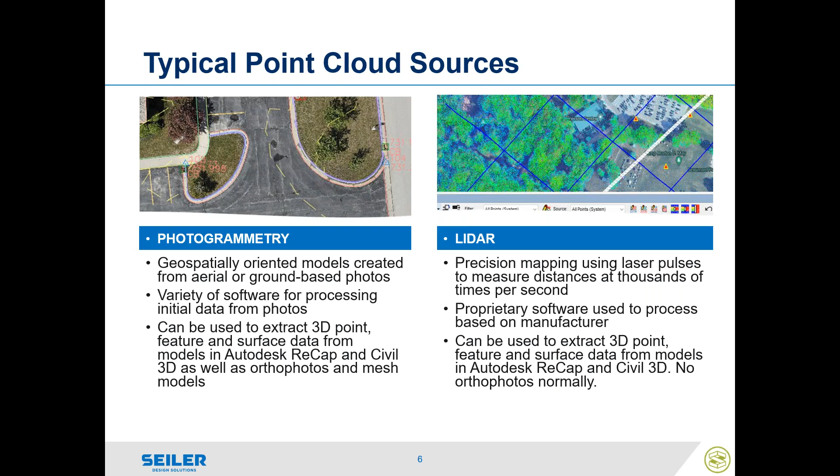The typical workflow we're going to use for today, we're going to capture the data and start our initial processing. So that's going to be the proprietary or the photogrammetry software. From there, we're going to import that into Autodesk ReCap Pro, which is Autodesk's point cloud processing software. In order for you to import these point clouds into things like Civil 3D, Map 3D, Revit, or any of the Autodesk vertical software in the AEC collection, you must run it through ReCap.

Autodesk removed the ability to directly import LAS files into Civil 3D back in about 2018. Even then, everything was converted to a digital elevation model and extracted from there. Now with ReCap, we can bring that point cloud directly into Civil 3D if we want to, and use that as a background reference, or things like Autodesk InfraWorks or Revit to model buildings off of. But we have to touch upon that ReCap Pro.

Since the late 2024 version and the current 2025 version, they have also introduced the ability to have additional data cleanup and point cloud classifications. Historically, Autodesk ReCap had the ability to classify, you can't see my fingers, but they're air quotes, that data into what they called regions.

Okay, it was a way to basically layer out your point clouds into points. Now we actually have our ability to follow the standard ASPRS classifications, at least the first dozen of them: point class 2 ground, class 0 unclassified, never classified, class 6 buildings, etc. So that ability is in there. They have also introduced an automatic, well, a semi-automated ground classification utility into ReCap Pro.

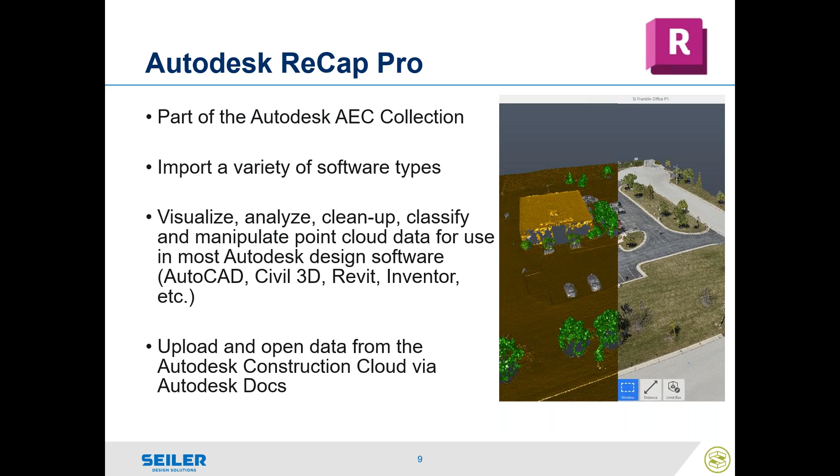Okay. So the processing we're going to go through is we're going to import a variety of data and transform any geospatial data to other coordinate systems as required. Sometimes we're going to get data from a LiDAR scan in a UTM metric format. Well, we're going to use this to transform it to a state plane coordinate system, US feet, international feet, keep it in meters, whatever. The point cloud will do the transformation in there, as long as it's in a common datum. Automatic and manual registration options are available.

Then we're going to classify. So we're going to run that automatic ground classification utility.

We'll walk through some details on what to do, what not to do with that, or we can manually classify points as necessary. We'll show you some tools that we can use for that. And then we can decimate that. After we do the classification, we're going to subsample that ground data to make model key points. And we can take it by percentage, or we can just type in the total number of points, and use that to create lightweight surfaces in Civil 3D without the overuse of redundant data.

So I'm going to stop the PowerPoint here real quick, and I'm going to go through a generic workflow that I would use for this data. So I have Autodesk ReCap Pro opened up here. I'm going to use a tried and true data set from our Franklin, Wisconsin office. It was the head of our GeoDrones area. It's probably the most flown site in pretty much all of North America at this point. Good testing grounds for all of our drones.

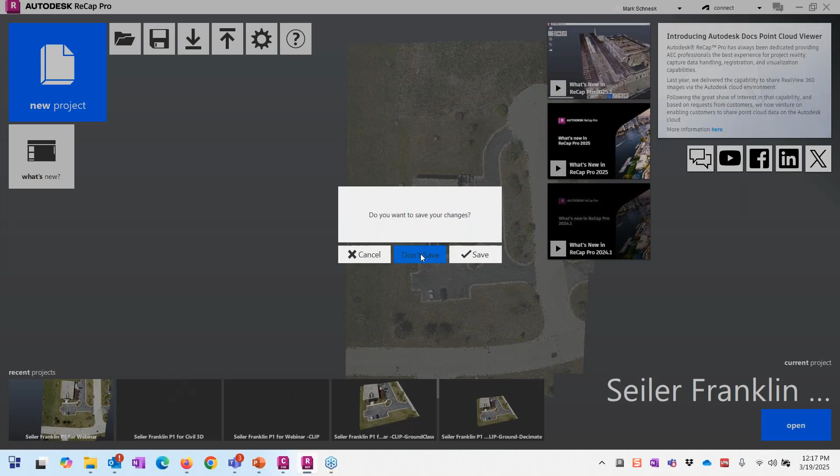So in this case, I just said, hey, new project. I'm going to import a point cloud. I'm not going to save my changes because I started an old one. So I'm going to say webinar project. I'm not going to go through a whole lot just to save time, there is a time constraint on this. Webinar project, and then I choose a folder where I want to save that, either a desktop or even a Dropbox site or whatever. Typically it's going to be your project folder. Select your folder, proceed, and then it creates the file. The file's ready to go.

All I have to do is drag and drop an LAS file, which I have one right here. I'm going to drag that LAS file into my project. Right there, it's going to say, hey, I can do some clipping on it. I can go to the advanced folder. This is where I can change target coordinate systems. So I know this was done in NAD 83, Wisconsin State Plane South, US foot, but maybe I want to convert it to Milwaukee County system or something like that. I can do that and tag that coordinate system in here.

If the software that I used to create the point cloud had put that coordinate system header in it, like DJI Terra will do, and I bring that point cloud in from there, the coordinate system would already be introduced here, and I can do the conversion at that time. If you're going to stay within the same coordinate system, there's absolutely no need to set a coordinate system in here unless you're going to transform it.

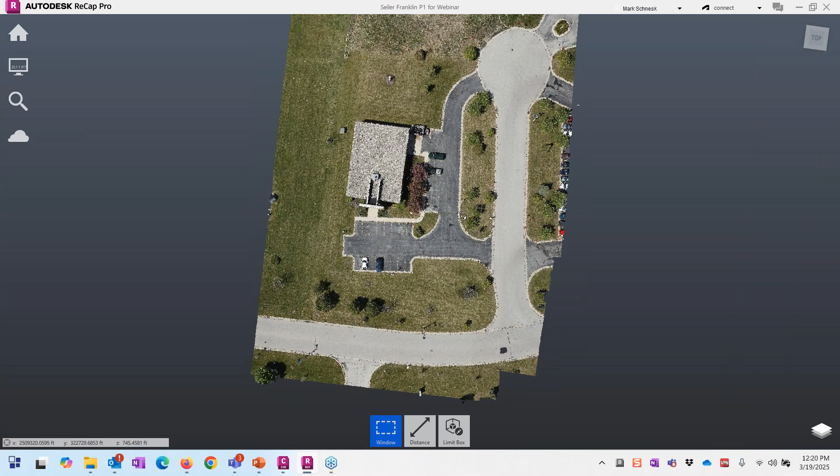All right, it's a very easy interface to use. Right mouse button lets me orbit around, mouse zoom in, and then I can pan around and select by the middle mouse button. All right. I have very easy menus to use. You just pop the menus out. Typical items like save, open, undo, redo. Here are the point cloud tools that I'll be using for decimating and uploading. So those are there, as well as exporting.

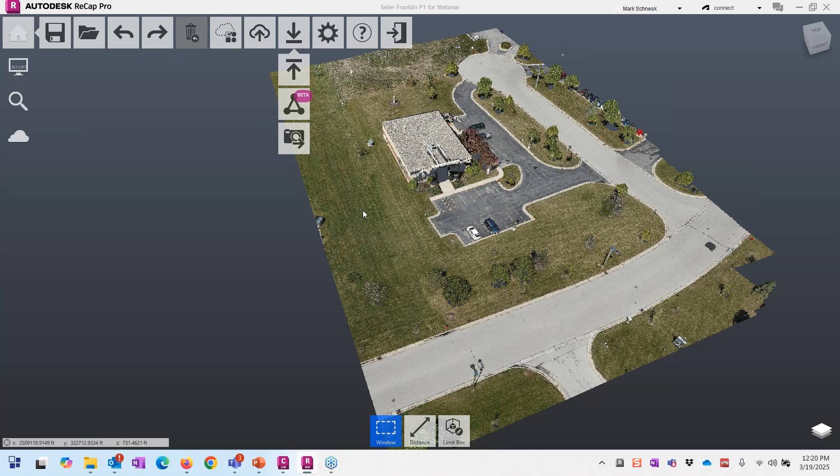The other nice thing about Autodesk ReCap is that it is what you see is what you get. Okay, it's a visual style type of program. Speaking of styles, I can look at that point cloud by RGB, which is what I'm looking at from photogrammetry, elevation, model modes, intensity modes, which for photogrammetry, there's no intensity values for photogrammetry.

I don't have a LiDAR point cloud in here, but different LiDAR values reflect different amounts of light back to the sensor. But photogrammetry is a passive light system, so you're always going to get zero intensity out of there. Normals, scan location, and classification. So right now, the classification is new, and everything's classified as class 0 unclassified.

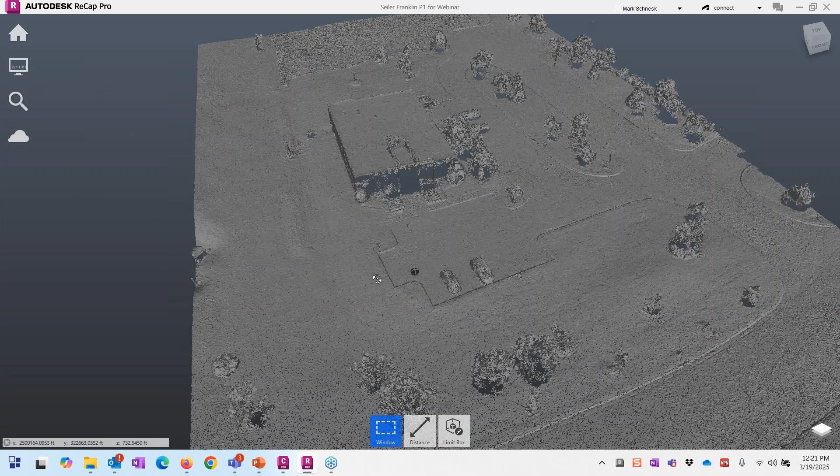We can also put on some artificial lighting, so we can apply some like hill shading effects to it. So if we are in a monocolor, we can kind of get some shadows on that and get an idea of what the point cloud looks like, regardless of what color we're in here. I have the ability to change the point display size and various visualization options on there. Let me go back to an RGB mode.

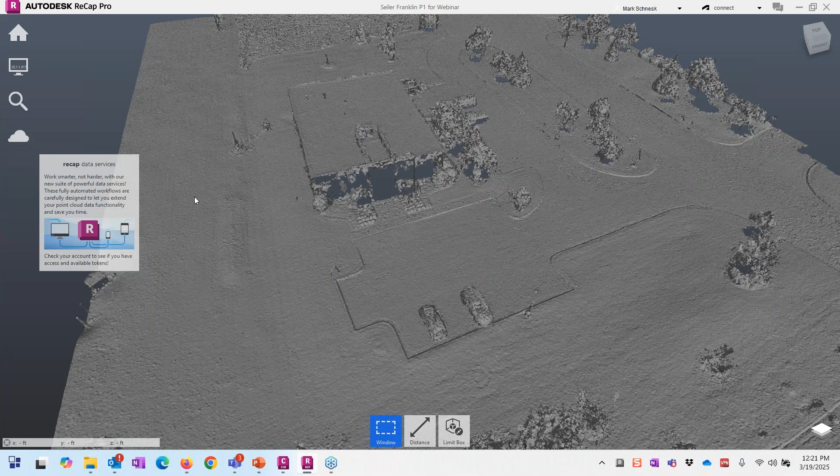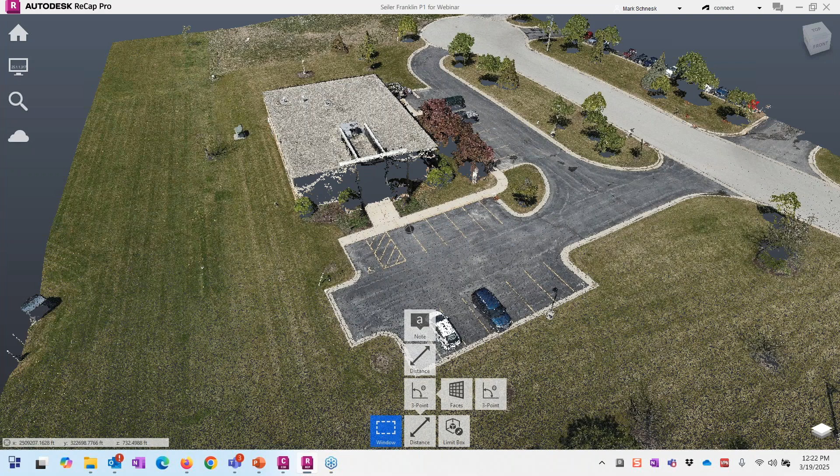ReCap Pro also has some great measuring tools. So even if I was just to take this point cloud, save it, and pass it on to my design team or architectural team to be able to just take measurements off there, I can very easily just get some distances. I want to make sure these parking stalls are standard length. They meet the city standards. I can take some measurements in here, and these become permanent annotations that I can export out as files elsewhere as well.

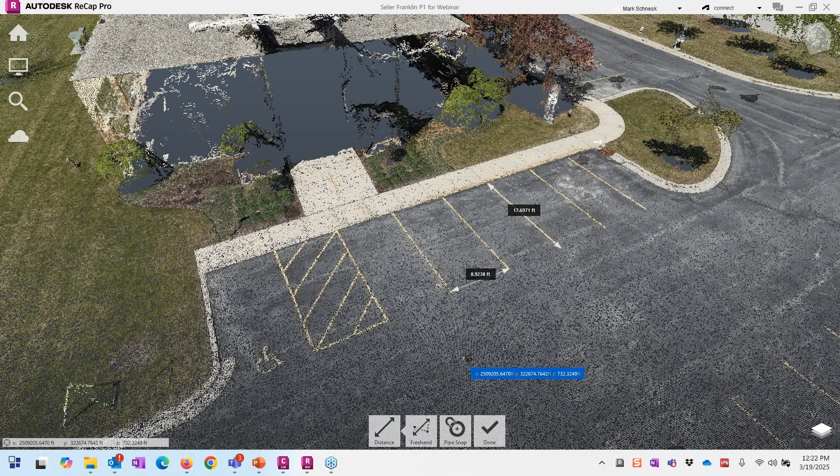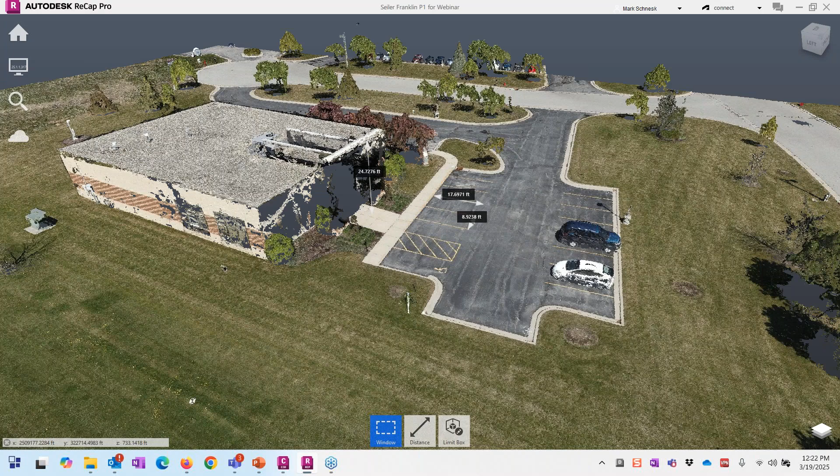There's some ortho annotation measurements. Hey, I want to know how tall the building is, so I can take a height. It's always going to measure either Z, or I can change the axes that I want to measure to. It's got some additional measurement tools, and I have the ability to clip the data and select the data. So I have either window, fence, or planar selection to select data, and I can clip data outside. So I can foreshorten the amount of data that I have.

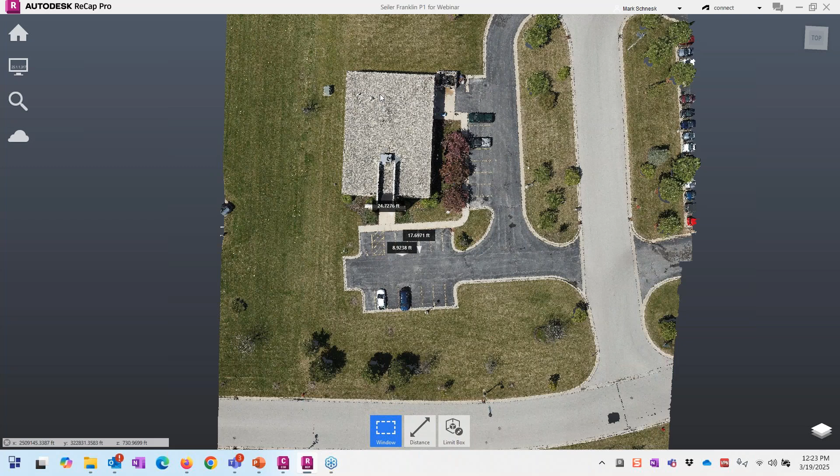Again, because ReCap is a what you see is what you get, if I was to export out what I see on the screen, I get a brand new model that's just that, and it's lighter weight. And so that's what I did for this one. Let me unclip here really quick. The clipping doesn't delete it. It's just like a layering system. Just for the sake of the demo, I shortened this up and picked a subsection of it. So I drew a window around my point cloud, and I used the clip outside tool to make a smaller data set, something that's a little easier to manage on an hour-long webinar.

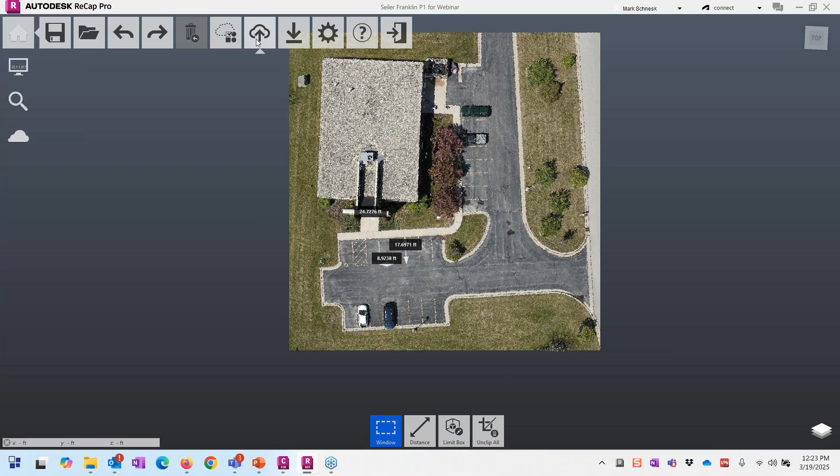Come up here, go to the export tool, and this lets me export this out and give it a new name. And it'll ask you, hey, are you ready to go? Are you sure you want to get this? Yes. What I see is what I get. And that's going to be what I get out of this. So I'm going to skip ahead to the next file. Don't save. So I've already clipped this out. There's no unclip tool. So this is all I've got. There's nothing left to clip. I've made a brand new model that is lighter weight and ready to go.

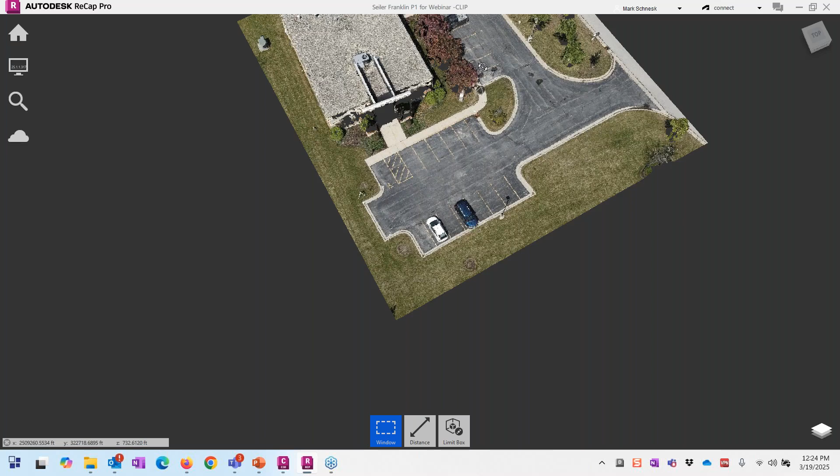So the first thing I would do with this model, if I'm going to create some topo out of this and extract some data, is kind of look in on this. Yep, I got good data.

Your data for a point cloud is only going to be as good as the quality of the scan. Garbage in, garbage out. You can't make magic out of nothing. So good quality scan data is going to make or break your ability. And this is, while it's really good data, aerial data can have some difficulties.

Especially with curb lines, you're going to want to make sure your scan data is either oblique on curb lines or maybe static data that gets those face of curbs and gutters, because any kind of shadows could impact it, and it will. You'll see when I do some extraction, I have some problem areas that I had to kind of guess or estimate where it is. And I may have to go out and supplement that with traditional survey data or rescan certain areas to get that. So don't be surprised if it doesn't work.

Even with some of the best software, I have that issue.

So the first thing I'm going to do out of the box once I get this is, all right, I need to separate the wheat from the chaff. I need to ground classify this. So Autodesk ReCap Pro has an automatic ground classification tool, and there's some presets on here.

I don't really recommend using the presets. There's an option of more detail and less detail, but those are kind of nebulous terms. I don't know what they mean. So I typically always go custom.

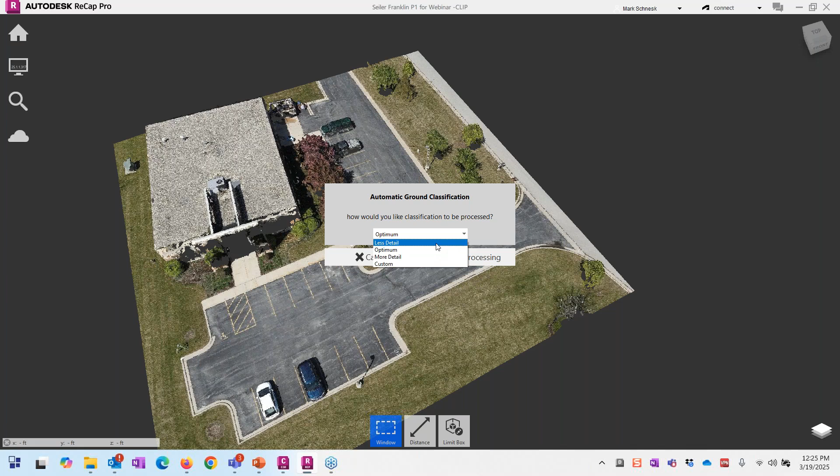And the way the custom details work, you have two variables you can change: the ground details and the processing window size. The processing window size is the size of chunks it uses for guesstimating what's ground and not ground. Typically, this number is going to be the same as the diagonal of your largest flat roofed building.

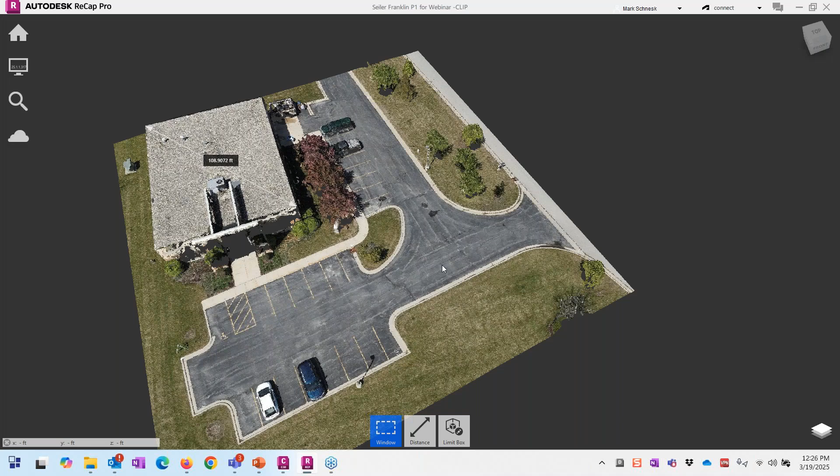So I went ahead and used the distance tool and got a measurement of the office building here. Not Z, back to freehand. It was about 108 feet, okay, so that's the number. When I use my automated processing, I'm going to put in my custom, 108, maybe 110 feet, a little bit bigger than my tallest measurement.

Now you have to be careful of this number. If you go too large, then it won't extract trees. It will keep trees in, and it does some weird things when it comes to trees and ground. So there's a fine line, and you may have to do this a couple times to get an idea of what works best for each site.

The ground details is the largest item that can still be considered part of the 3D object that will not be pulled out of ground. The smaller the ground details are, the more finite items that might pull into the ground or out of the ground. This is also a number, set to 1 meter right now. I kind of leave it at that. That will make the difference of whether something like this pad ends up in the ground or not.

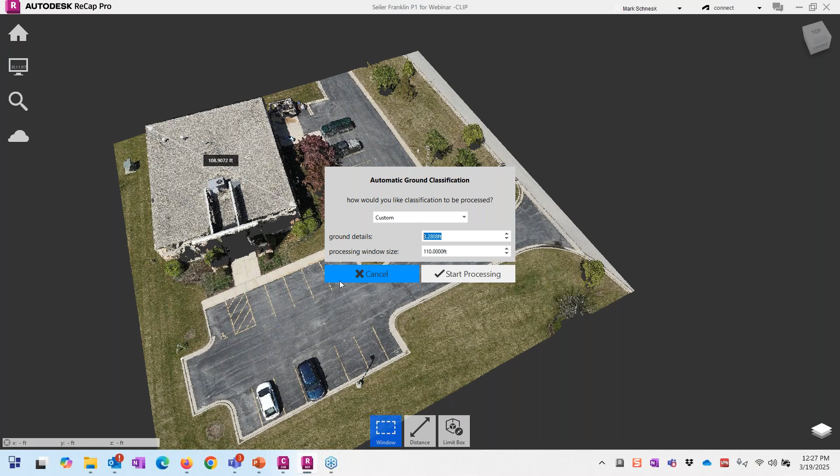All right, and then all you do is hit start processing. Once you're done, again, it takes a couple seconds. I'm just going to go ahead and open that one. So I got a ground class RCP, and it's done.

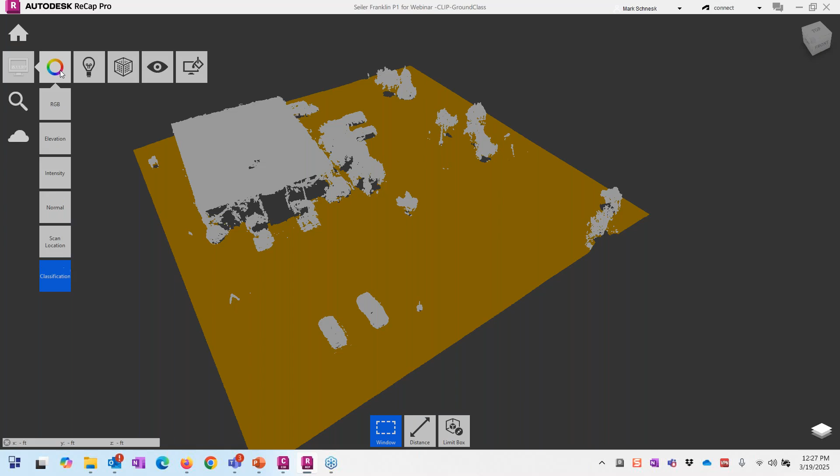You can tell when I go here to my visualization and come down to classification, the orange or brown area has been classified out as ground. It has left everything out. This is a very common algorithm used by a lot of different software to extract that. Let me turn on some lighting so you can kind of see that hill shading, and you can see the items.

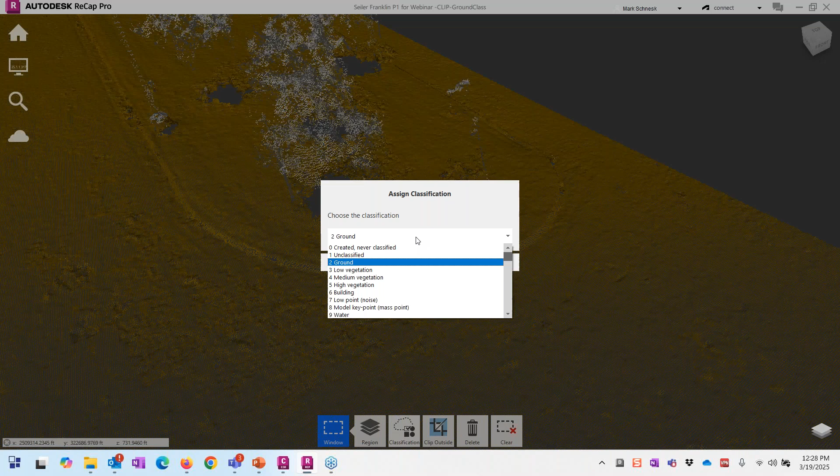Now, if you get an item that is not classified properly, you can go ahead. It's like I got a mound, or I got something over here that's a low-level shrub that I don't think is ground. I can go ahead and manually select items that I don't want as ground, hit the classification button, and choose the classification that I want to move it to.

It's kind of hard to select things though. If I wanted to, let's say, move this shrub over to like a vegetation classification, I have to be careful when I choose that item to move it. You can see that I am also getting the ground underneath of it.

So there's a fine line, you got to kind of get in an angle where you're not selecting everything. So what we do here is ReCap has this limit box. Let me go ahead and set this limit box, I'm gonna wait for my screen to catch up there, it's putting a lot of strain on my process here. So I'm going to hit the limit box, and I can go ahead and pick that tree.

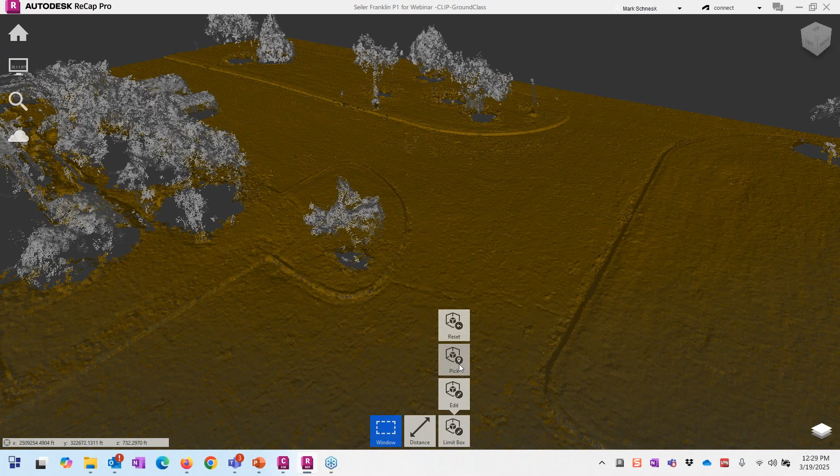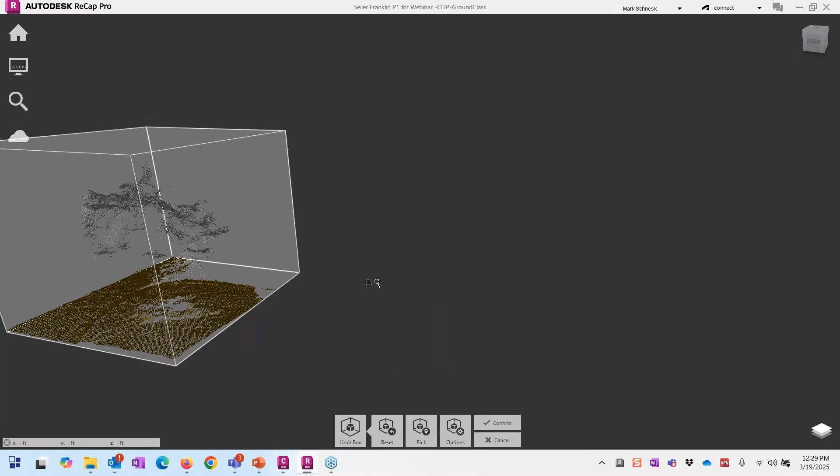What it does is it puts a little rectangle, a little cube around that area. It helps me isolate that. And then I can drag these sides out to make sure that I've isolated the object I wanted to classify. I can do this with buildings, or I can do this with trees, and I'm going to bring it up a little bit. So that should be pretty good. When I say confirm, I've now isolated that tree from everything else.

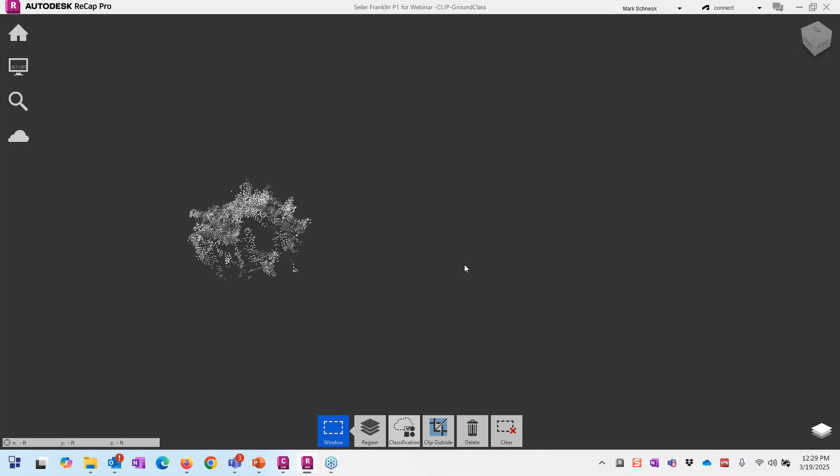Now I can just go ahead and do a wide swath selection of that tree, make sure that it is there, and then I can say classification, and maybe I'm going to classify that as medium height vegetation. I'll assign that classification to it. Then I'll come back, clear my selection, and then reset my limit box, and I can see that those points have now been classified under that. I can manually go through and classify other items as I see fit, or clean up data here and there. All right, so that's your classification, your ground classification.

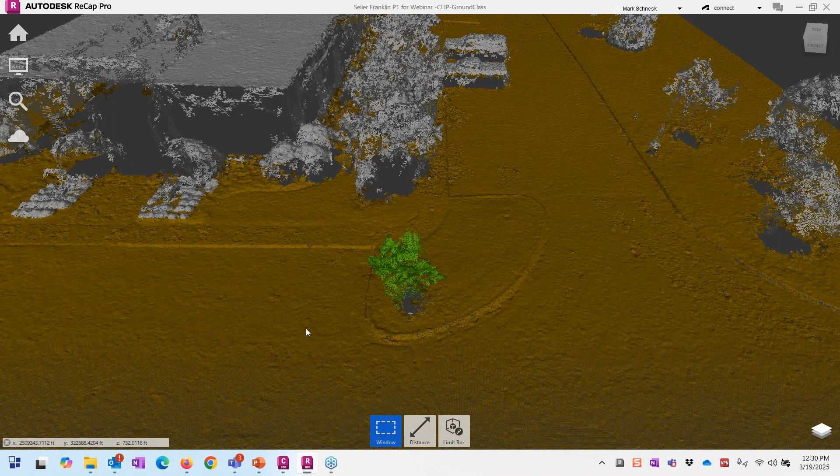We're almost done with our ReCap journey. At this point, the last thing I'm going to do is export this out, and I can come here to my layering system. So Autodesk ReCap has a layering system available to it. And then I can come here and expand on my classifications, and I can turn off any of those classified items and only visualize what I see.

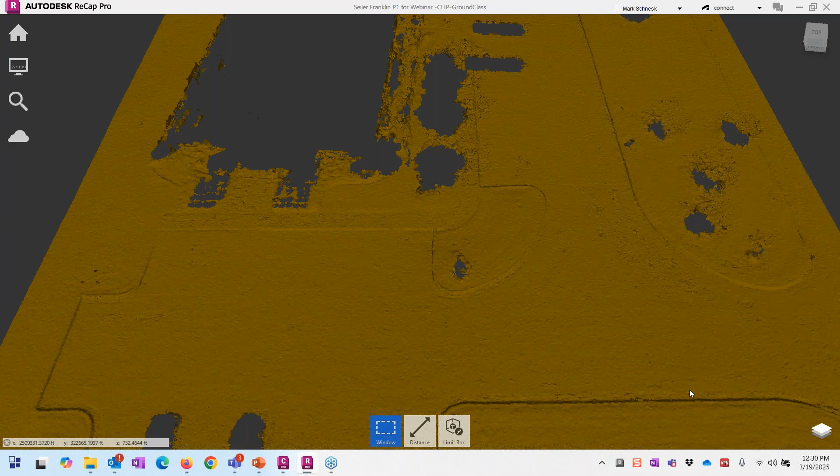So if I wanted to export a brand new point cloud that was just the ground only, again with our what-you-see-is-what-you-get approach, I can come up here and say export out, and make a new ReCap exported file that's just that ground. If I opened it up, there would be no other unclassified or tree or vegetation items in there. But again, it's not what I want.

I can bring this into Civil 3D and import that in, but then I'm stuck with, I don't know how many million points - I think at this point there's like 40 something million points in here. It's still too much, and it's still a little bit too noisy in areas to make an accurate surface. So what I'm going to do is run Autodesk's point decimation utility.

What that does is subsample that ground data and move them to a key point area. I can do that by percentage - maybe 1% is enough. I'll be honest with you, you want to make this as light as possible. You can do it by percentage, but to me that's still going to be too many points. I like to pick the number of points instead. So when I click the approximate number of points, I can see there's still 2.6, 2.7 million points in this point cloud here.

Maybe I only want 1,500 points out of that. Why did I choose 1,500? Well, I kind of go like 0.1% or less of the points that I want to deal with. Again, in the field, you'd be doing a 25 by 25 foot survey or data collection, so you kind of make that estimation in your head. I still think 1,500 points is way too many - I ran it and still had to do some cleanup on it, but it was better than 2.7 million.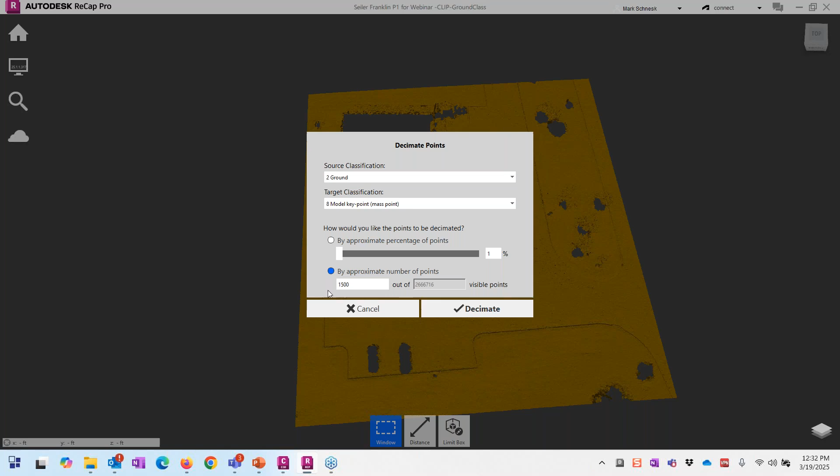All I do is hit the decimate button and it moves those points from ground to, here it moved 1,486 points to model key points. So now I have a new layer that I can play with, model key points. I'll turn off the ground, and now I can see these pink points - kind of hard to see. I'll turn up the point display so you can see them, they'll really pop out. So now I have this lighter weight point cloud made up of these model key points. With everything else turned off, this is what I export.

I'm going to export this out as a new point cloud specifically to import into Civil 3D. This is the point cloud I'm going to import into Civil 3D to create my lightweight surface. All right, that's the first step.

Classifying, pulling your data out from your ground, creating your model key points, bringing that into Civil 3D and making a surface out of that. That will get you the ground basic data. We are going to supplement that with additional extracted data to bring those details back in, like top of curb, back of curb, gutter lines, key points, control points, etc.

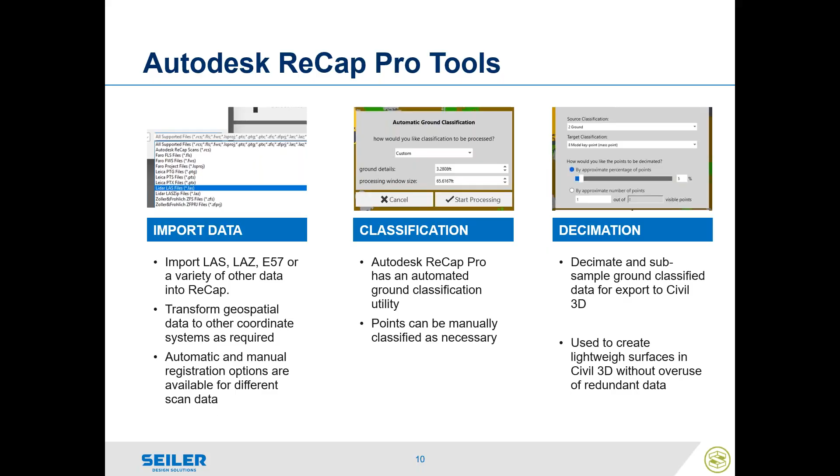We're going to use a different routine for that. So I'm going to switch back over here to the PowerPoint really quick. So the next step is the Autodesk Construction Cloud and Autodesk Docs.

Autodesk Construction Cloud is Autodesk's cloud-based collaborative design, construction, planning, and administrative software. It includes, and its base function is, Autodesk Docs. Docs is the foundation tool within the Autodesk Construction Cloud. It's similar to Trimble Connect, Dropbox, SharePoint, or OneDrive. It is a cloud-based file storage, but also a visualization and markup tool.

You can input drawings, PDFs, Word documents, Excel documents, and Recap models, as well as InfraWorks models and Revit models. And when you get them up there, you can have a file folder system, invite members in, assign permissions, view or edit permissions. So it's very, very quick and very easy to share data, but yet lock it down and keep it secure and keep eyes on it as needed, while protecting sensitive data from people who don't need to see that.

Okay, the Autodesk Docs is part of the AEC collection. Secure cloud-based storage, access and editing permission levels, synchronized data between multiple PCs and cloud. There's an additional tool you would install called the Autodesk Desktop Connector. It acts as a conduit between the file system on your computer and the file system for the project in the cloud.

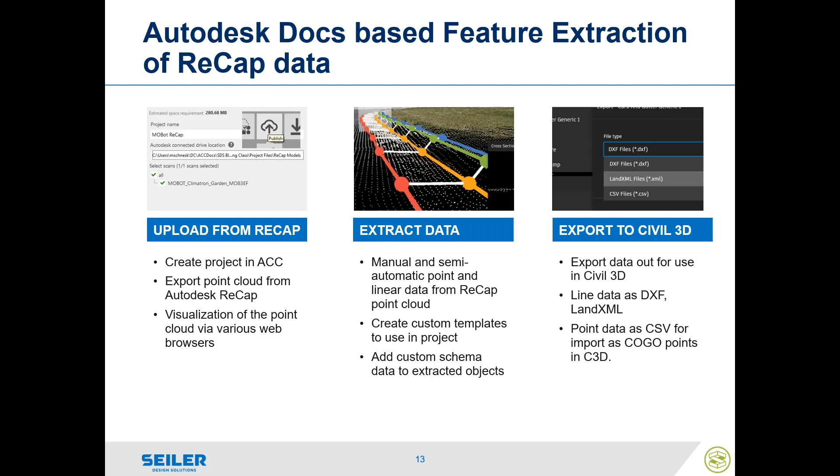So I'm going to stop the PowerPoint and go back to my full model, turn everything back on to where it was, showing it back in RGB color. Then from here, I'm going to pull my point display back down.

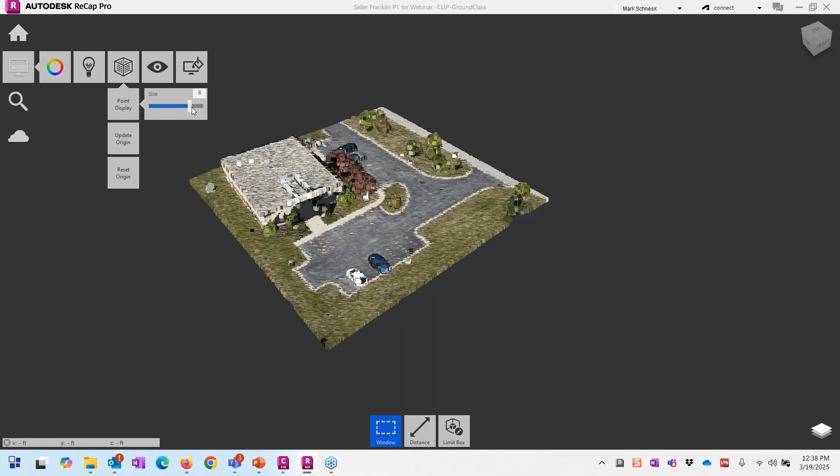I'm going to upload this to the cloud. Well, I already did one a day ago, so there's this publish to the cloud option. Let's discuss the Autodesk Construction Cloud very briefly.

So we have several projects available. I've created one for our webinar here, and I am the only member of it this time, but I can definitely invite other members in.

Once that's done, the project admin gets to add members and add company permissions. So if I invite stakeholders from other companies to share in the data, I can give them different permission levels based upon company or role or additional access levels.

So every member that I bring in and invite, I can give them permission levels all over. I can bridge projects across multiple projects, and there are other various settings.

But as part of that project creation is the docs. I've activated docs here - this is my file storage area. In my file set, I just create files and folders as if I was doing it on a web server or a regular server at my company.

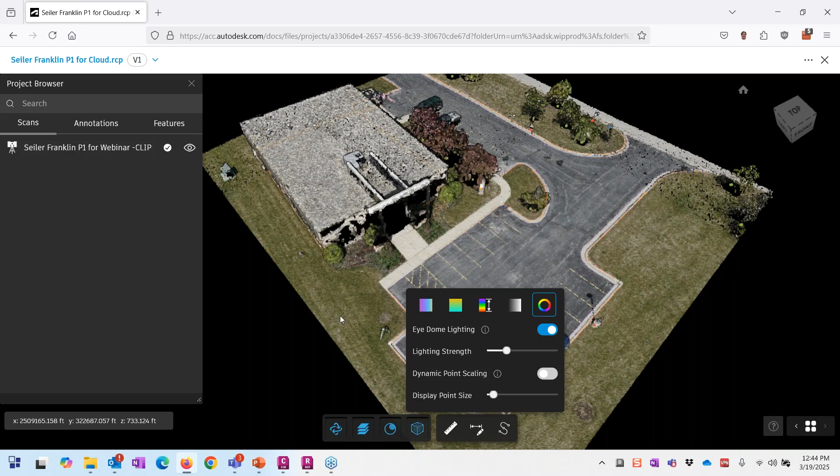Okay, and as part of the tool space available is to be able to visualize this again as intensity, as an elevation map, shading mode, normal map, or RGB color. We could turn on and off Eye Dome Lighting, change the lighting strength, and change dynamic point scaling. But more importantly, Autodesk has brought in their point cloud processing and extraction tools in this program. So I'm going to show you those very briefly. I've already run that on this.

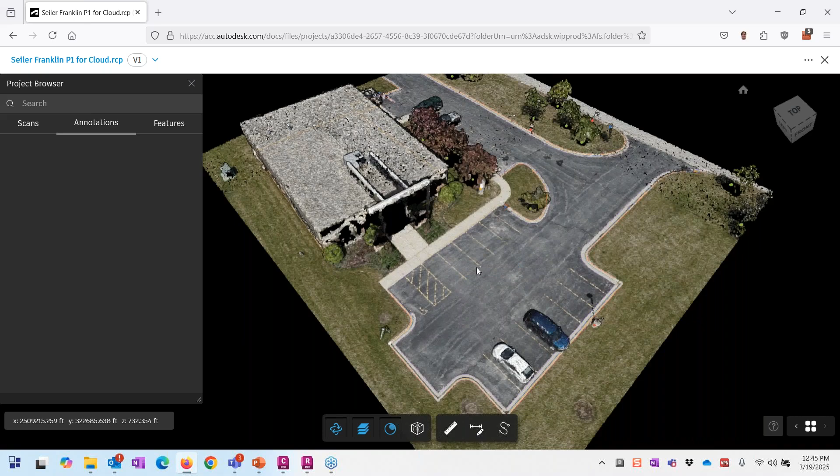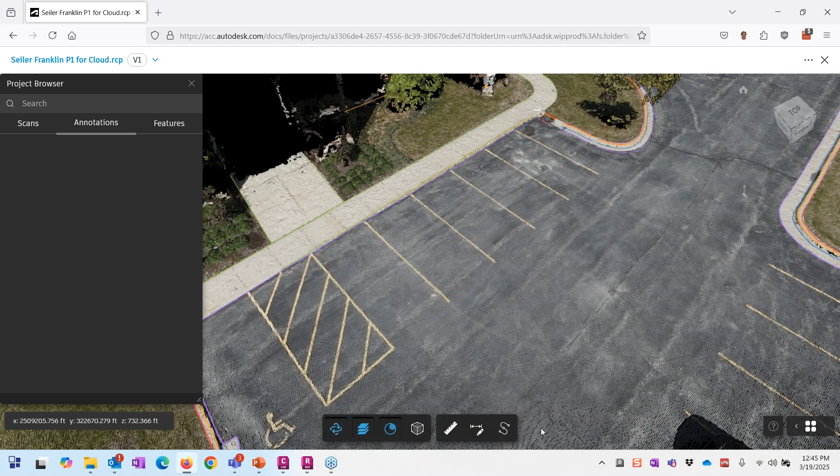So there's measurement tools in here, just like I saw in regular ReCap. You can measure between objects. There we go. Zoom in here a little bit. There we go. So I got measurement tools in here. Measure here to here, and then I can keep those measurements or I can extract those out as well. They become permanent parts. But Autodesk has also brought in their extraction tools in here.

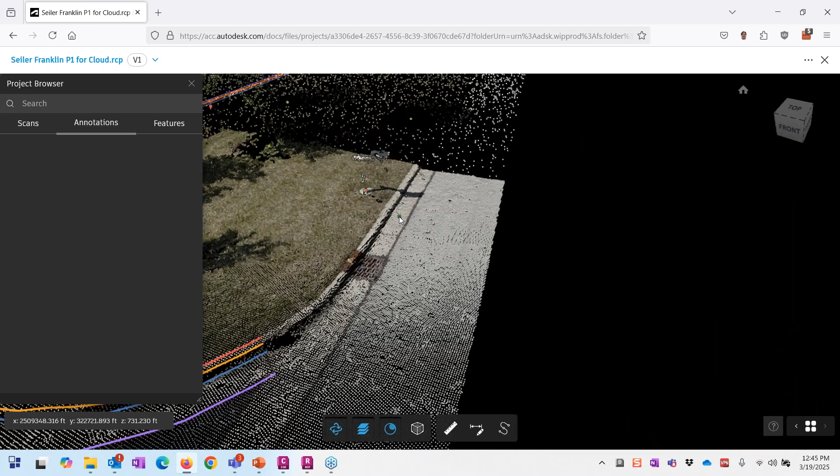So as you can see, I already have some line work that I've extracted from the curb and gutter in here. Their extraction features, let's see if I can run on this curb line over here, one that is fresh. So when I run the extraction routine in here, I can extract linear features, I can extract 3D lines, driveways, or just regular polylines, like drawing a 3D polyline on the back of there, or I can extract a variety of points. It comes with several schema libraries built in.

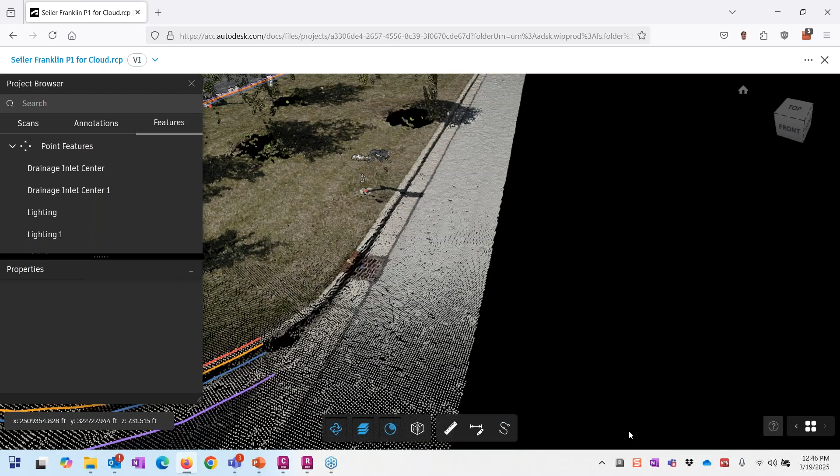So for points, I can assign things like bench, bollard, bus stops, cabinets, gate posts, fire hydrants, your typical data collection point features, or I can give it a title. I can choose an arbitrary color for it based upon what I see here, and I can apply a feature code, and I can apply a description. Very key points when it comes to exporting this out as a CSV file, point northing, easting, elevation, description for running into my descriptor key in Civil 3D. Okay, for both lines and for point values.

So to extract the data here, I'm going to run a very basic curb extraction tool. I've created some standard curb shapes. So you can create basically a cross section. If I run the default cross section tool, I'm going to go ahead and hit default. You're going to assign a direction. Again, if you're running TBC, this should be familiar to you, where you're just going to go ahead and set up your typical section. Okay, it's a pretty bad section. Let's go to a little cleaner section. There we go. Again, it's only as good as the data.

So if it's noisy data, you may end up getting some nebulous data, but it's going to help you when you have a better data set. Lower and slower, again, for curb and gutter, you want to make sure you fly it with some oblique photography, right? You're going to make settings for your alignment algorithm threshold. So as part of the AI, it's going to check as it extracts how close it is to the original section. I can choose the step interval, 1, 2, 10 meters, down to 0.1 meter, and then the cross-section depth.

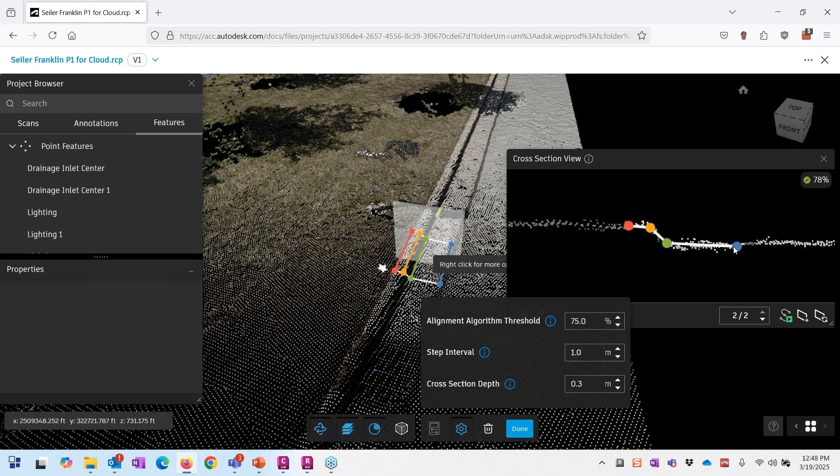The thinner your depth, the better your model is going to be, but you're limited down to 0.3 meters, which is about 1 foot. I can either then at this point manually extract by pressing the plus button, and it tries to continue finding those, or I can press the play button. So if it reaches a point where it doesn't match, I can stop it, I can rearrange it, and then I can tell it to continue. And it's going to go through and start its extraction routine.

Once it reaches some spurious data, like I have this tree, I'm going to stop it. Maybe I'll manually extract it and manually modify it as I see fit. Okay, that looks okay. I should be able to press play again and continue on.

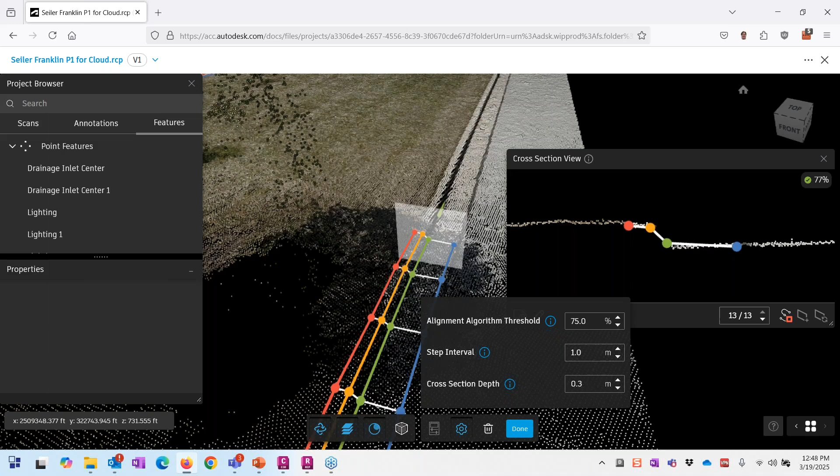Stop, fix. So it's going to take a little bit. Again, the better data you have, the better it's going to continue to extract. But you kind of get the idea. Now, this one is this curve I was able to run. You're going to have mixed success. I ran this curve. I ran the entire thing in one run right up to about here.

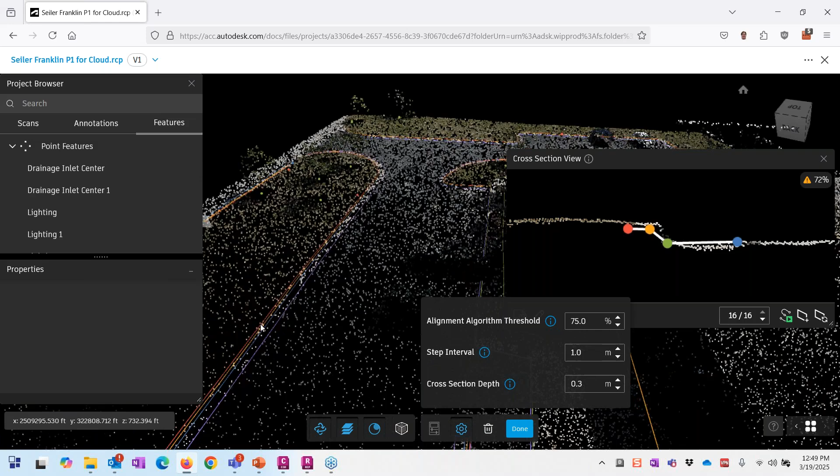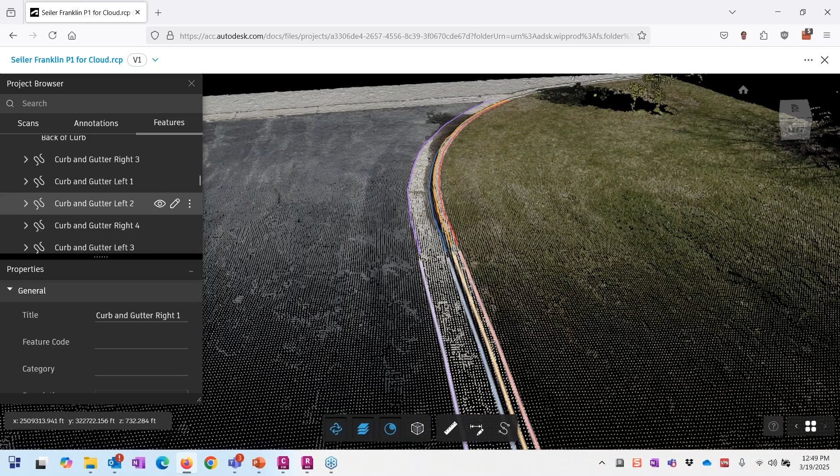When you're going to get to curves, you're going to change your, let me go to features, curb and gutter 1, 2, let's get to here, here, here. There we go. I had to change my frequency down to more like a tenth of a meter or 3/10 of a meter. And even then, again, it's only as good as your point cloud data.

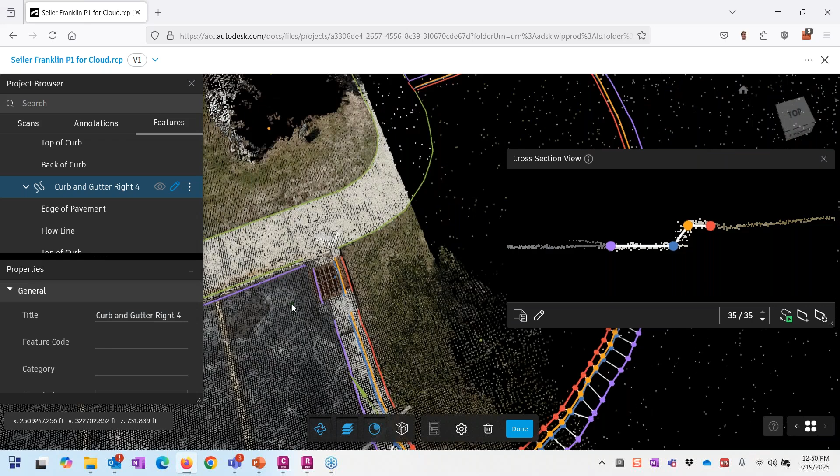So I didn't have a cleaner point cloud at the time when I was running this, changing computers around. So with what I've got, I really probably could have gotten better with a denser LiDAR on that. But you might not get 100%. But in areas where it's going to be kind of nebulous, you're going to have to probably go back and collect some data manually or refly that portion of it.

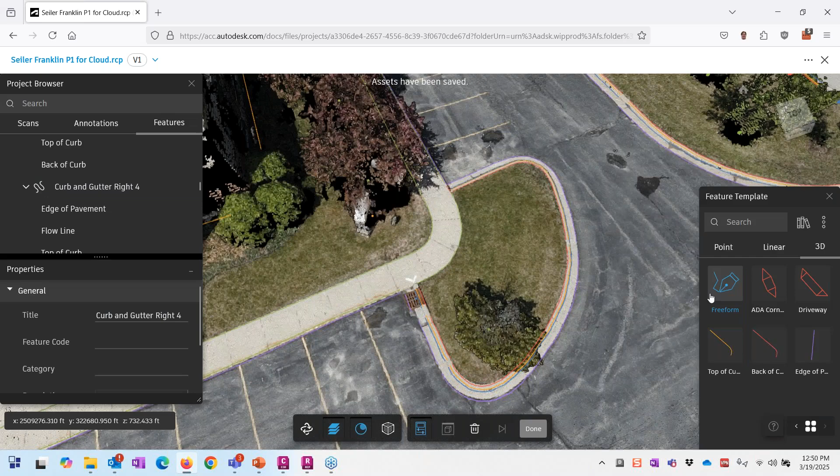Besides that, discard changes. Yes. I can also create just manual lines. So I can come here to the 3D portion of it and I can just draw, line to line. And then that becomes a line that acts on the point cloud that I can extract as well. So I did the back of sidewalk here as a line. I did a majority of the building. I wasn't able to get all the building, but enough of the faces that I can come through and continue

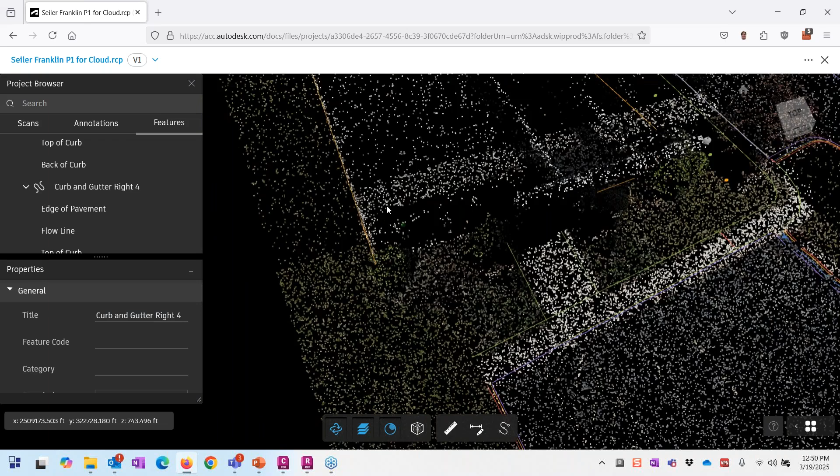those off. Curb lines. Now where point data comes, I've already done the points. When you're extracting point data from here, you're going to choose my feature class here, click it, and then I'm going to click on the ground next to this light pole to set the elevation of that point, and then I'm going to slide that over in this view to center it as best I can, and then done. And that becomes a point at the center of that base of that light pole.

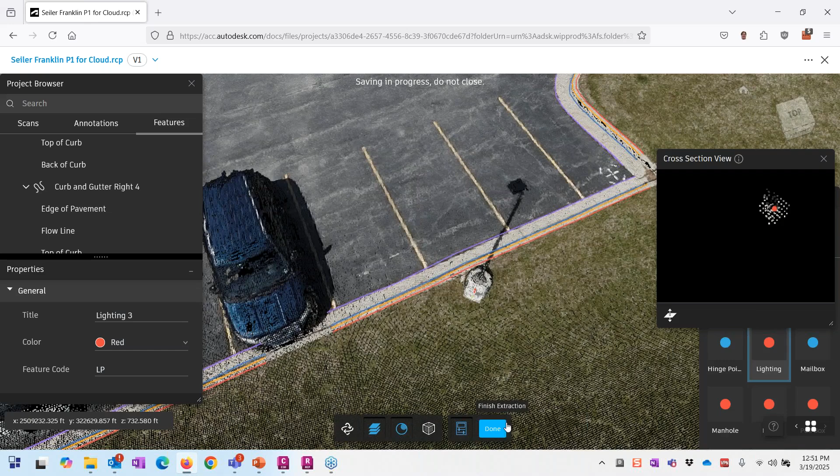And so I extracted some light poles here, some trees, a sign, and a couple catch basins as point data. So this is the extraction tools in here. Things like Trimble Business Center and Pix4D Survey and TopoDOT. I mean, it's not up to TopoDOT speed yet. I think they're very active in making this a better product. So expect big things with the next version that's coming out.

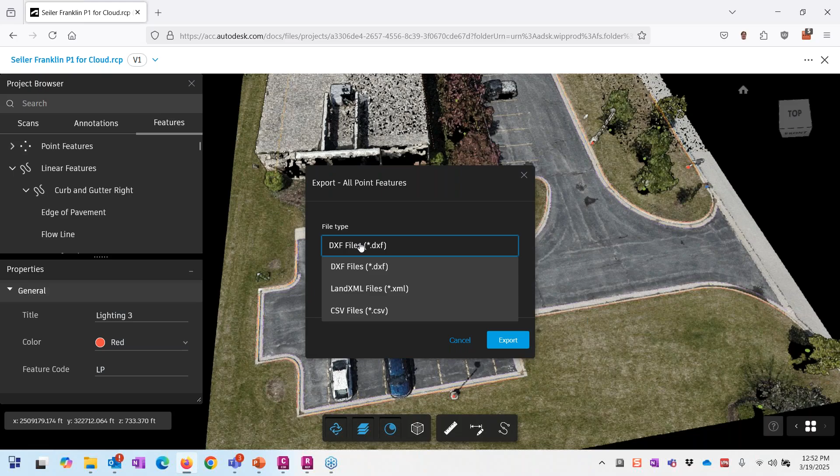And when I'm done with all my features, I go ahead and I download them. So I can download all my linear features either as a DXF file or LandXML file, or for the points as a CSV file. And if I chose CSV, it'd be point, northing, easting, elevation, description. So when I bring that to Civil 3D, they come in as COGO points. Okay, so that's that on the ReCap side of it. Once I'm done, back to the PowerPoint very quickly.

So Autodesk Civil 3D, of course, is engineering and survey design software based on AutoCAD, AutoCAD Map 3D, and Civil 3D. Create an existing condition drawing from points created in Autodesk ReCap Pro and Autodesk Construction Cloud, and then I can save the drawing back to the Autodesk Construction Cloud for visualization and sharing.

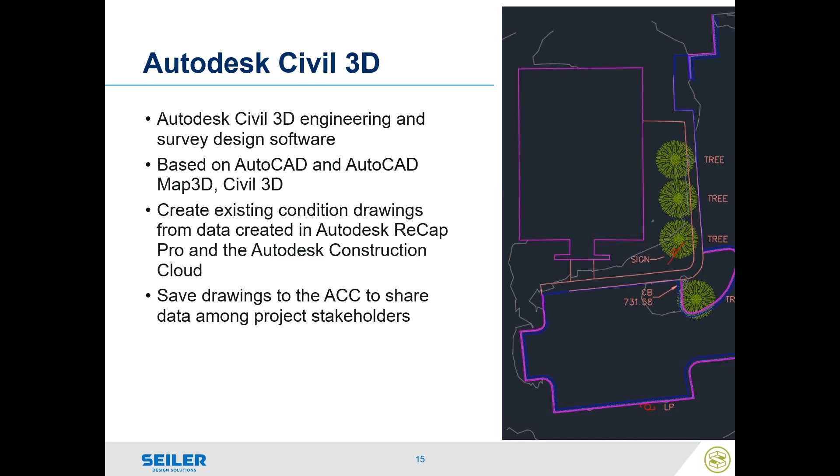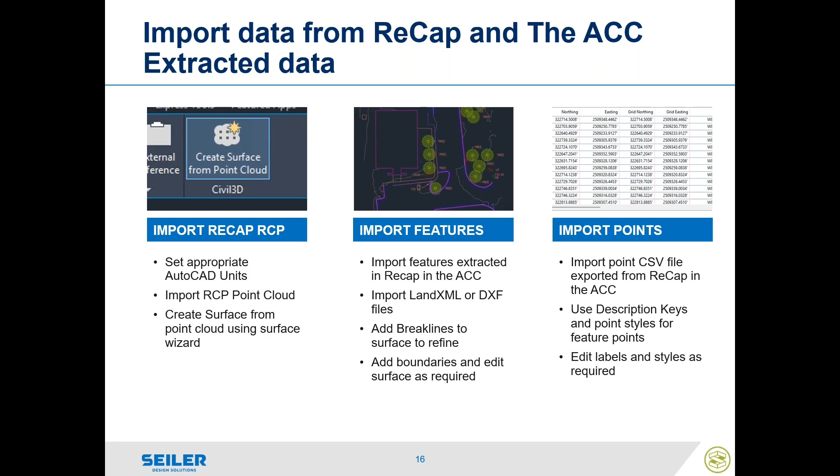All right, so the process here is to import my ReCap RCP, those decimated model points, create my surface using those points, then import the features extracted from the ACC, LandXML and DXF files, add those as breaklines to refine the surface, and then finally import my CSV points that I extracted from the ACC. So I have Civil 3D open right here.

The secret sauce that I can tell you, and then I'll do this very quickly. We'll take the last 5 minutes here to answer questions. The secret sauce: when you're bringing a ReCap file, I can attach a ReCap file into my Civil 3D as an XREF, but I know I can set my settings here. This is in Wisconsin, so I can say, I'm going to set my settings to Wisconsin State Plane 1983, NAD 83, South Zone US foot, right?

But that doesn't help me with the ReCap file. I must set my units, AutoCAD drawing units, to US survey feet, because I tell you, even in ReCap, when I say, hey, this is a US survey foot point cloud, it is in State Plane South in US feet, it's still in meters in ReCap. And so when you bring that metric point cloud into an AutoCAD drawing or Civil 3D drawing, it's going to come in by default in international feet. So you'll get a scaling issue.

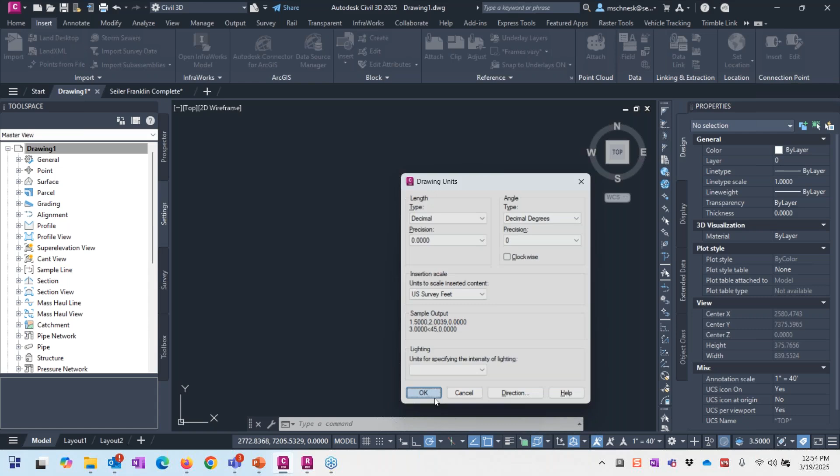Number one complaint I get, the number one question I get: hey, why isn't this coming in right? You must set your AutoCAD units to US survey feet. And then I'll say, now I'm going to attach that lightweight point cloud. Boom, it falls right into place. I can turn on my geolocation, set my Bing mapping background to OpenStreetMaps or something. You can see it falls right in that spot.

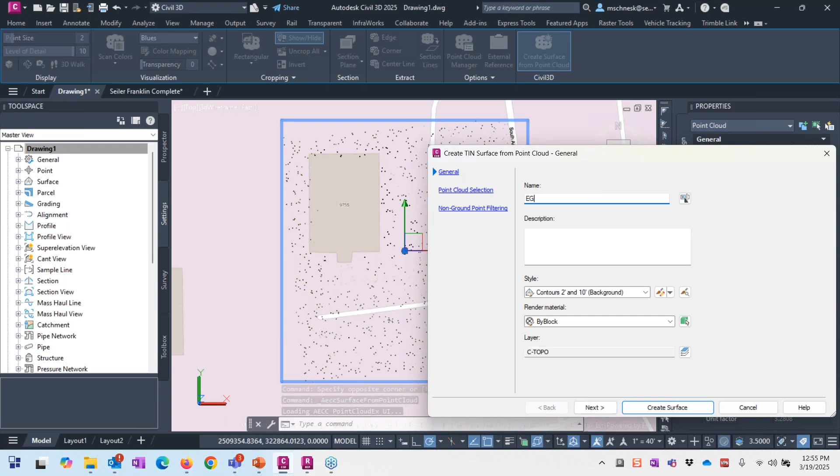Then I just select that point cloud, because it's the lightweight model point cloud, and I'll say create surface from point cloud. Give it a surface name, EG point cloud. Give it a style, 2' and 10' background, and then no filter. It's already been filtered by ReCap. And then create surface and just let it go. The nice thing about the surface creation tool is it runs in background, but I only have like 1,500 points. It should be done in about 15 seconds.

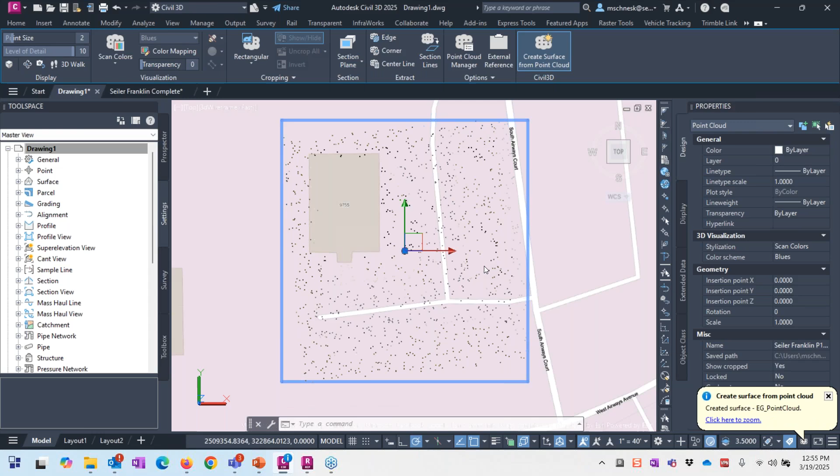All right. There's still some points here that I need to edit. There it is. So I got a bad surface point there. That's fine. Once your surface is created, I could just come through just like I would normally edit a surface, and I will go ahead and delete those points. By the way, if you haven't used Civil 3D 2025 and you're used to point cloud editing, in order to delete a point, I had to have points shown. Not anymore. They just automatically show up when I run the tool. And then when I'm done editing those points out, I just exit the command and it takes me back to the original surface.

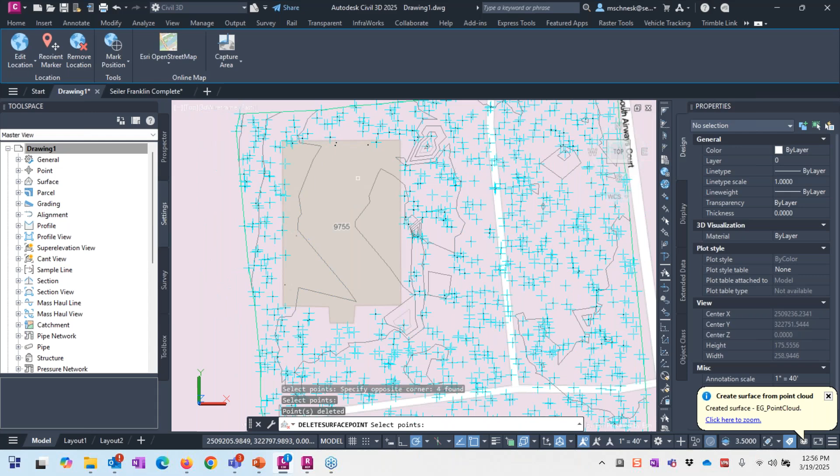So I had a few surface points to delete here. They didn't quite filter out, which happens even with the best software. Sometimes it doesn't filter out. So I got rid of some of these extra points that were noise points per se, and just cleaned up that point cloud a little bit. There's a bunch of bushes and stuff here, so these are not real points. So you kind of have to know the site. But it's not as popcorny. We got a nice lightweight site. A couple more points to get rid of.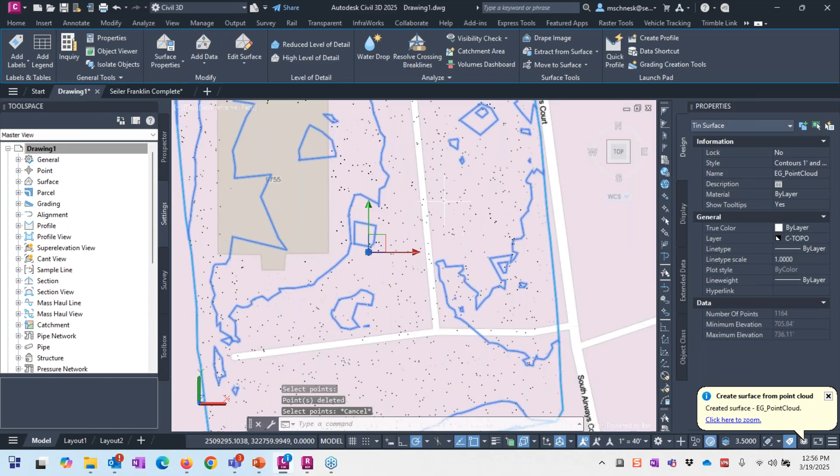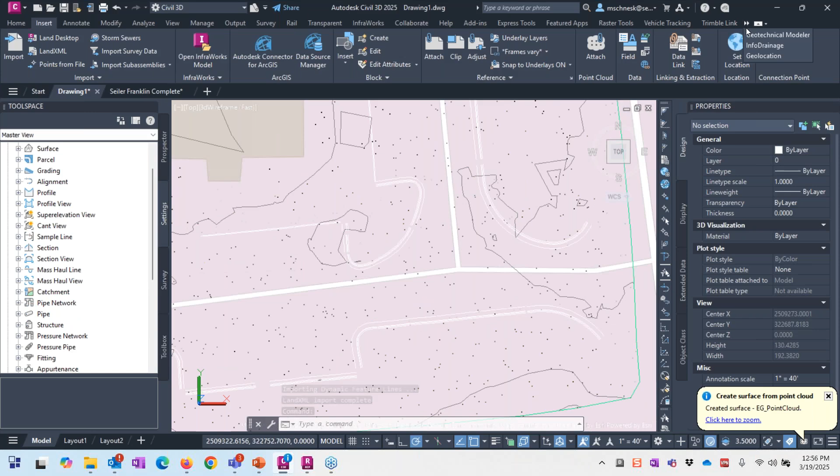The next thing I'm going to do is go ahead and insert my LandXML. So I exported all my features out as LandXML files. Look at that. Boom. There are all my features I extracted. Let me turn off that background map so you can see them. Geolocation, map off. There's all the line work I extracted in ReCap Pro.

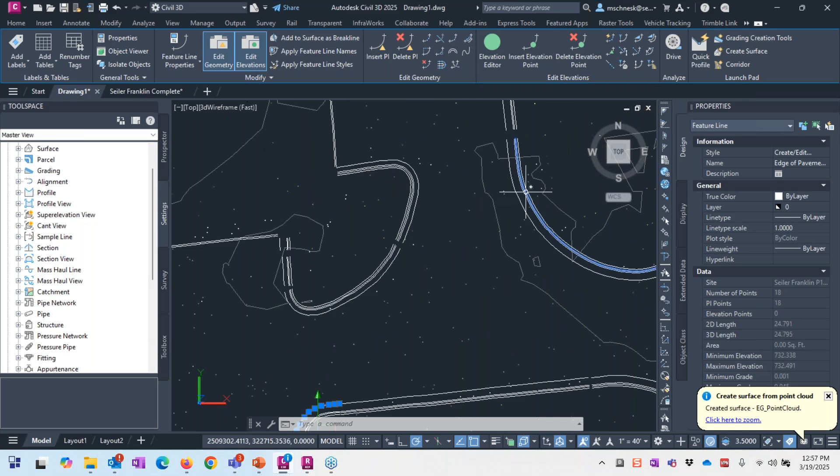Now I did a little bit of fixing; these are feature lines. So I can use the feature line edit tools right here to join these together, fillet my curves, join these two together, clean up some of these weird bumps and points by smoothing out some of those extractions that didn't quite come out right. I can use the weed tool to fix that up. But then I bring that in and add that to my surface.

So to jump to that, there is the finished surface. I cleaned up those points a little bit and I added these to my surface as a breakline. So if I select my surface here and go to the object viewer, you can see now it's a cleaner surface. I actually have the curb line data in there. Would I do ADA and ramp design with this? No. I'm still going to need traditional survey. But if I'm doing this over a 10, 20, 50, 100 acre site with some drainage swales for a subdivision design or preliminary design or drainage, all day long, it's accurate enough.

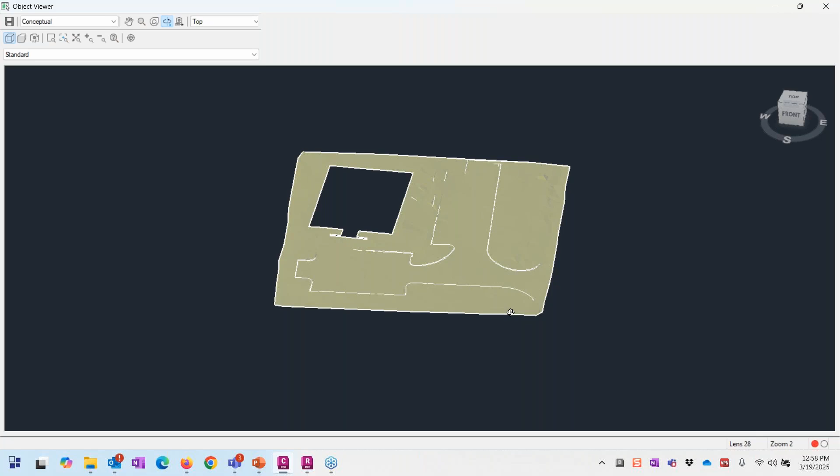All right, so that's the process, and then I imported the points. So you get your points. I set up a description key set that matched the codes that came out of the settings I set in the Construction Cloud, and I just imported that CSV file as a PNEZD file.

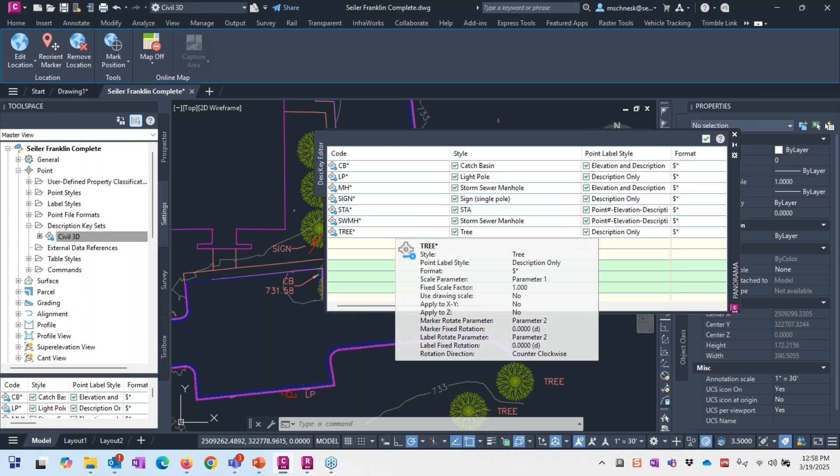And so there are all the trees and the light poles. I didn't put a right symbol for a light pole, but there's the sign I collected. There's all the trees I collected. They are COGO points at that point, at the right elevation. So everything is elevated appropriately and displayed on the surface.

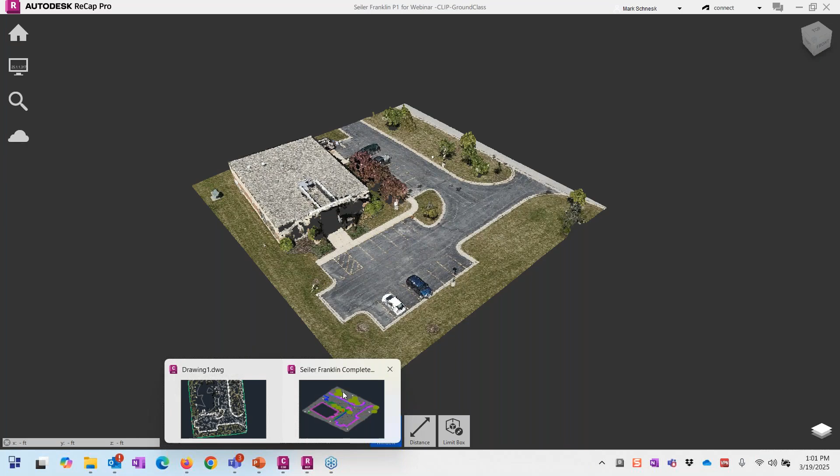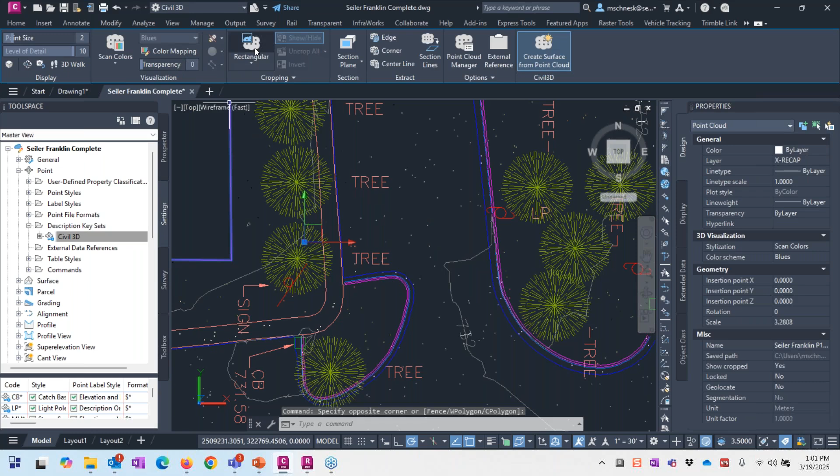So my point cloud's in here. If I turn my point cloud back on, oh, that's my ortho. You got to go to 3D wireframe. Let's go back to my top view. Zoom extents. I think I'd have to bring the full point cloud in, but with my point cloud here I can come and cut a section plane. It's not like a cross section. I can't project this point cloud into a cross section view with a sample line, but I can cut standard sections and maybe do a visualization.

But there isn't a point to surface or COGO point check. I would typically have some hard shots or control points, and I would do a point to cloud. I would do that in something like DJI Terra. No, I don't have a way to do that directly here. Again, this is an option. It's not my favorite or best option, but it is an option.

Okay. Is there a snapping feature in ReCap to connect the new line work? No, there isn't really. I don't think I found that. Maybe there is, and I'm just not seeing it, but I haven't seen it. There is in InfraWorks, funnily enough, but not in ReCap.

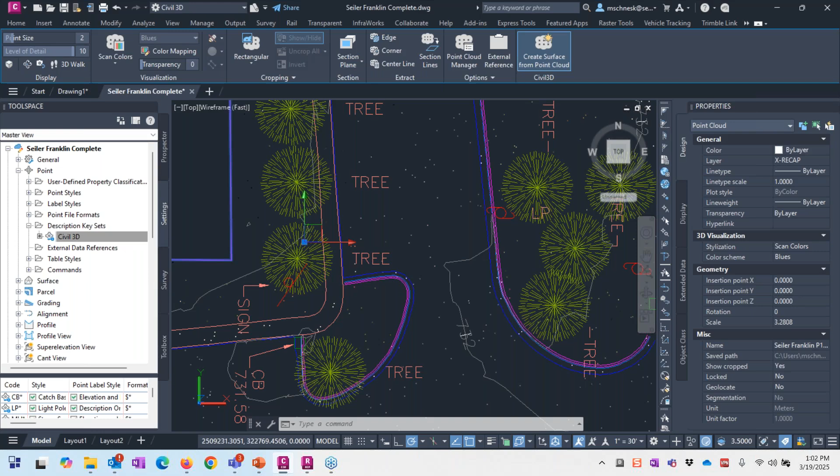Is there a way to blanket an area in points rather than just selecting individual points? This would be helpful for ground shots in a field and parking lot. I'm not sure I understand that one, Todd. Oh, I see. For the data collection, no. At that point, you would use the point cloud instead. So with ReCap, you can import multiple ReCap files.

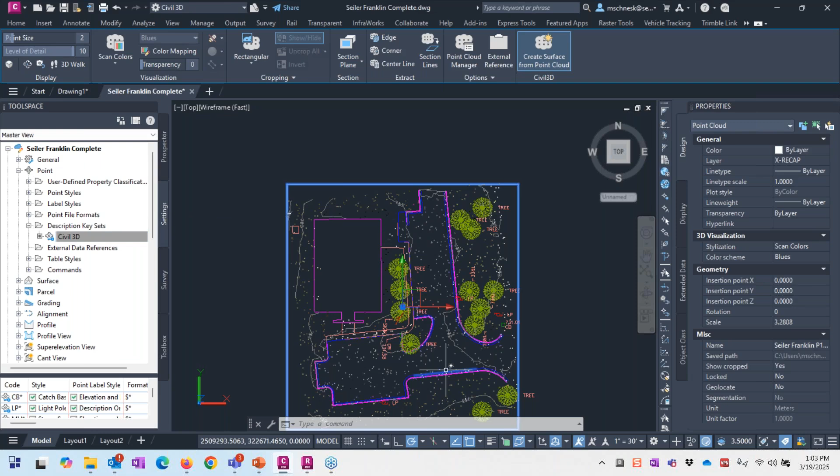When using LiDAR data that is in UTM meters and converted to state plane, when I bring it into CAD, it still comes in meters, so you have to scale. The secret sauce is to set your AutoCAD units to US survey feet. Then when you bring that point cloud into Civil 3D, it will scale to US survey feet.

I forgot to tell you, there is a caveat with bringing in Land XML. These came in as international feet, and I had to take all my stuff and scale it up by a factor of 1.000002, so I converted them to US survey feet. If I brought them in as a DXF, they come right in the spot. I got a case with Autodesk to get that fixed.

Is there a cost for the cloud processing? No, the cloud processing is no extra cost. It's part of your AEC collection.

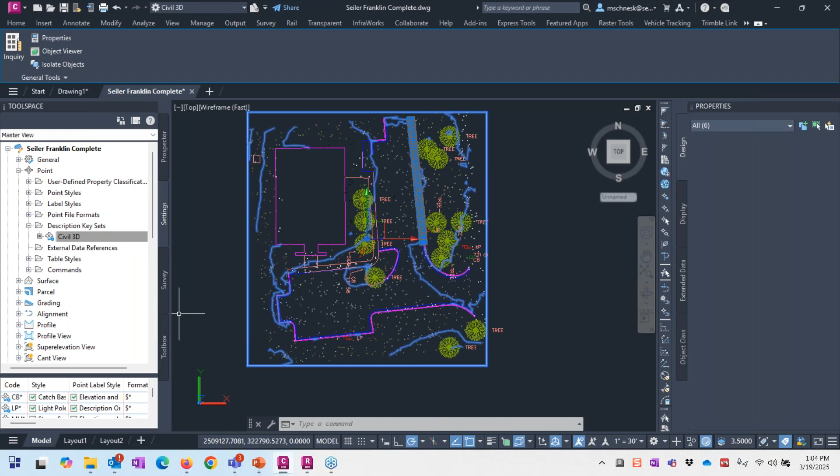In Docs, how does the account admin add a new admin? That question's really easy to answer. When you are in account admin, when you add users to your account, I can say what's their access level, change and make them a project admin or account administrator. You just invite them in, say make this person an account administrator, and poof, they get an email from Autodesk: congratulations, you're an account administrator. But only account admins can create additional account admins, so there is a hierarchy for that.

Let's see, perfect, thank you for the question about ReCap.

What is my favorite option? I have two. I'm a big fan of Trimble Business Center—I know it's an Autodesk webinar, but it really has robust extraction tools now for what we have available. I'm also big on Pix4D Survey. A lot of you who have taken some of my classes on drone processing, if we sell that as an option, I'm a big fan of that. They all have their strengths and weaknesses. No one tool does it all; we haven't quite reached there, so I usually reach for two or three different tools when I'm extracting.

That kind of answers those. More robust software, blah blah blah, yeah, so that would be that.

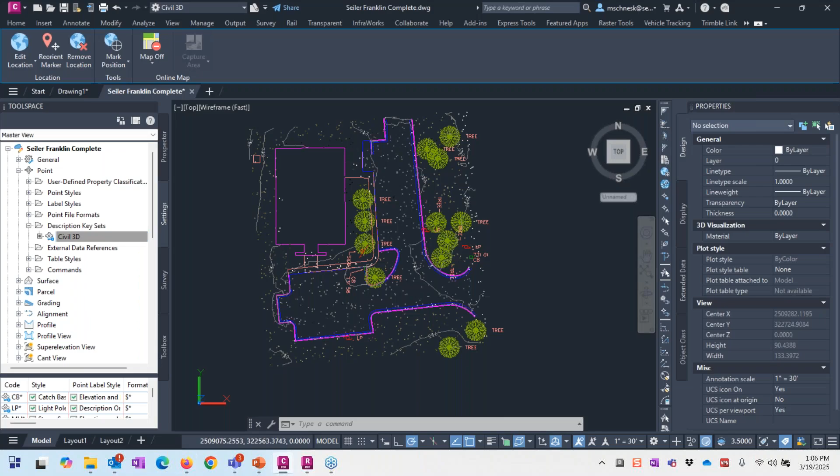Do you need BIM Collaborate Pro? You do not need BIM Collaborate Pro to do the feature extraction. It is part of Autodesk Docs, right there. The only time you need BIM Collaborate Pro is if you want to share the survey database, which allows design collaboration for Civil 3D—meaning data shortcuts, sheet set manager, and the survey database can be up on the cloud as well. That's what BIM Collaborate Pro does, as well as Revit Central Model sharing. You do not need Collaborate Pro for just the docs; what comes with your AEC collection is good enough.

I think that answers all the questions. Anything else? That's it. Well, thank you everybody for joining. I don't know, Eric, did you want to add anything else before we're done here, or anybody else? No, otherwise, Mark, you did a great job. Thank you, all right, great.